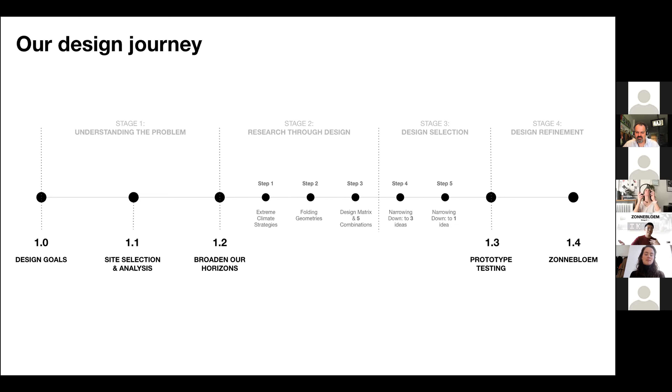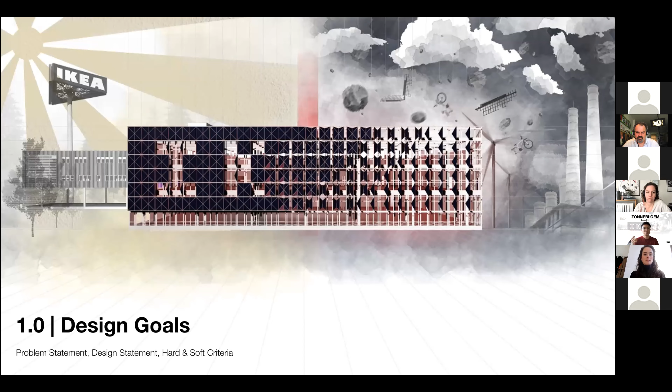So let's begin. It's important for us to understand the main problem we are tackling: extreme climates and self-protecting PV panels. Our group focuses on the real possibility that as climate change progresses, extreme weather conditions will be more common than today. Hence, it is pertinent that Zonnebloem first protects itself, is durable, and be a visual inspiration for the masses towards sustainable design. Therefore, the important hard and soft criteria are as described so we can achieve our design vision.

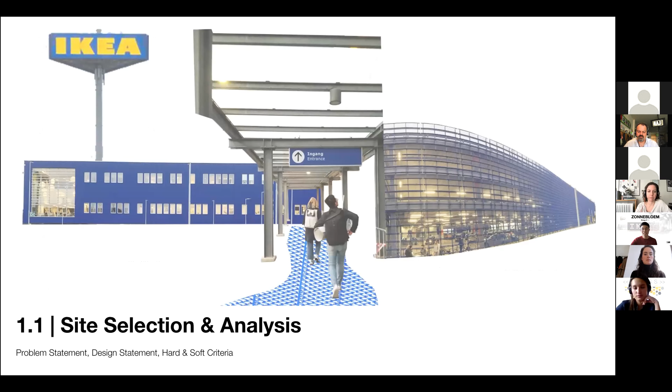Next, we look into a range of existing building typologies and sites based on criteria such as scale of operation, feasibility, and whether it is a standardized typology that can be widely implemented. Eventually, we narrowed our selection to the furniture retail giant IKEA in Delft, largely due to its advantage of being a highly visible building. It has a global scale of operation, maximizing the potential of Zonnebloem in inspiring more people.

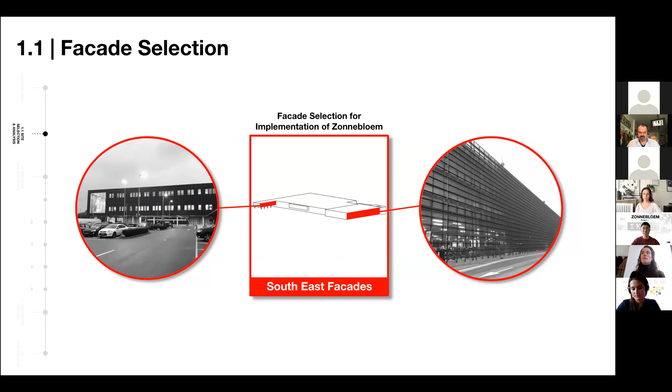With IKEA in mind, based on environmental and visibility studies, we determined the 2 southeast facades as ideal for implementation. Subsequently, we took a deep dive into different solutions to broaden our horizons.

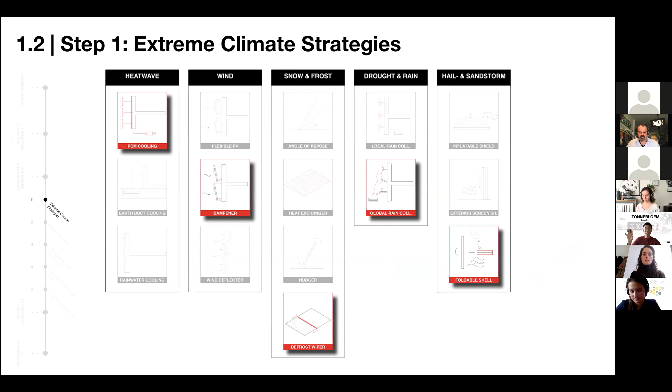First, we took into consideration the different climatic conditions and brainstormed corresponding solutions. From all these, we eventually decided that the foldable shell idea is the one with the most potential in terms of being durable, being appealing, and usable in many different extreme climates.

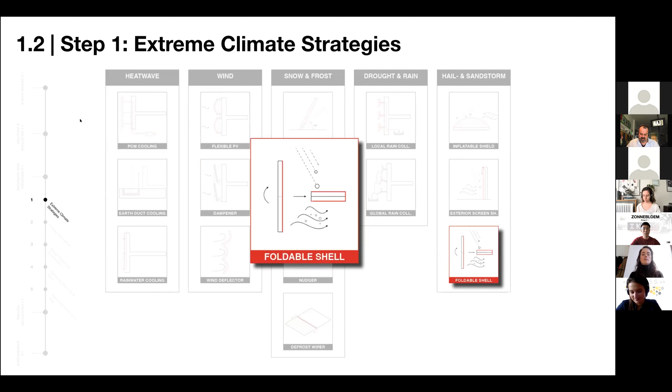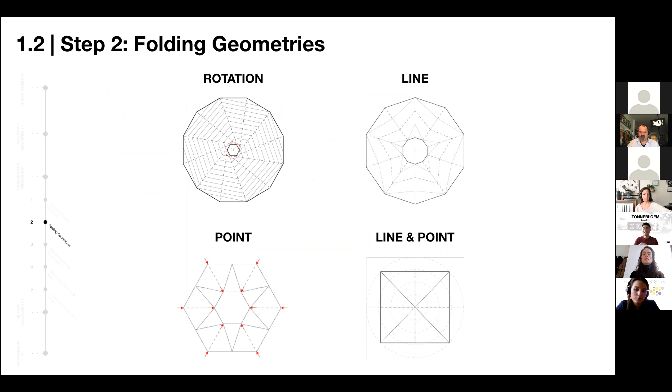This sprouted a whole new branch of exploration as we tried to understand how foldable and deployable structures actually work. They can be categorized into 4 main types.

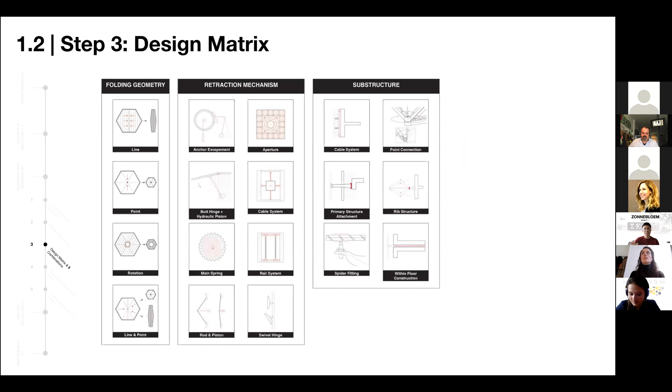Together with understanding how we retract the folds and structurally support them on the facade, we constructed a design matrix whereby individual types of folding can be matched with corresponding retraction mechanism and substructure system, as shown in this diagram. These 5 ideas we brainstormed are the potential candidates for the final design.

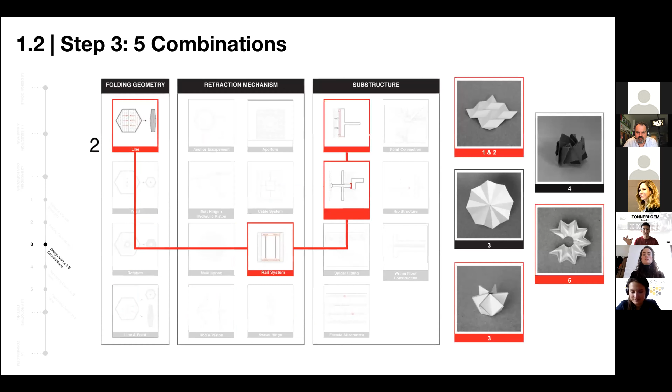With these 5 ideas, we further narrowed them down into 3, which we developed in detail to fully understand how each of them work.

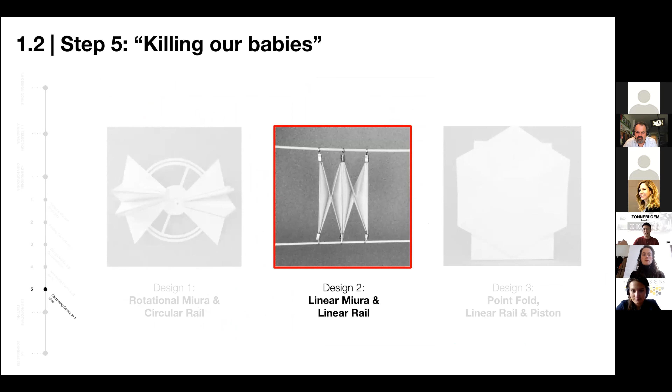In a painful process we call killing our babies, we attempted to select the final idea to move forward with, and the difficult decision brought us to design number 2, a simple Miura fold on a guided linear rail. While we were all quite sad, we had to forge on with the prototype testing phase.

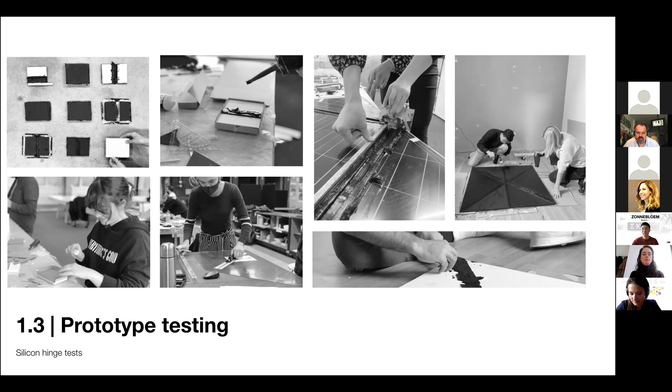We aimed to resolve some of the unknowns within our final design, which most notably lies in the silicon hinges that we chose to make.

As we explored and tested various silicon profiles, we ended up buying all the black silicon tubes from 2 different HEMA stores. Through a mixture of failures and sticky hands, we determined that the double flank open tapered profile best fits our objective of a unidirectional folding.

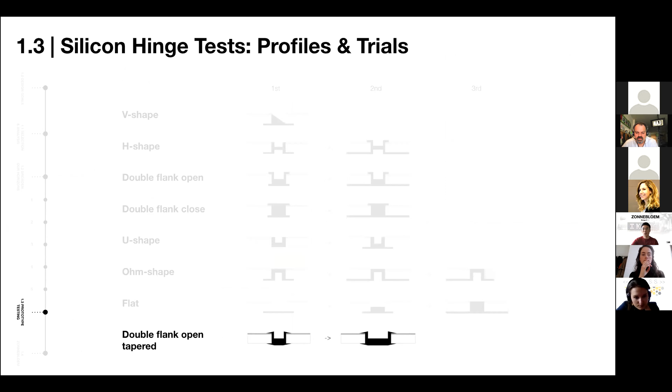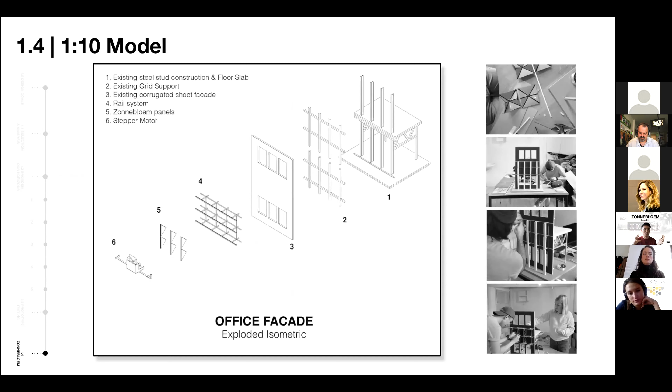With the silicon hinges sort of resolved, we gained more confidence and momentum in building the final prototype for Zonnebloem. We constructed a 1:10 model to review the substructure strategy and visualize the folding of Zonnebloem on IKEA's facade using Arduino, as shown in this diagram.

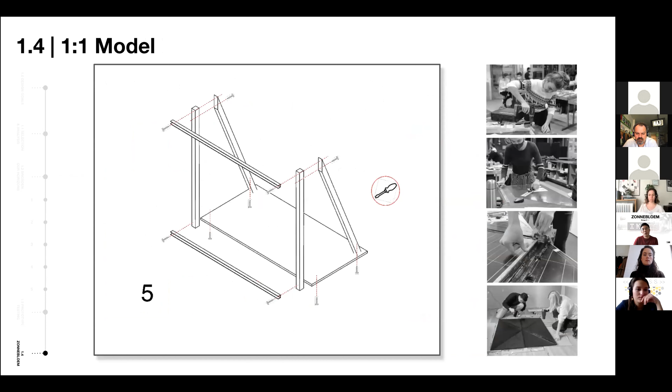Furthermore, this is a 1:1 model, which was constructed to verify our silicon hinge test. Shown here is the assembly process of how the various parts and components come together within this 1:1 model.

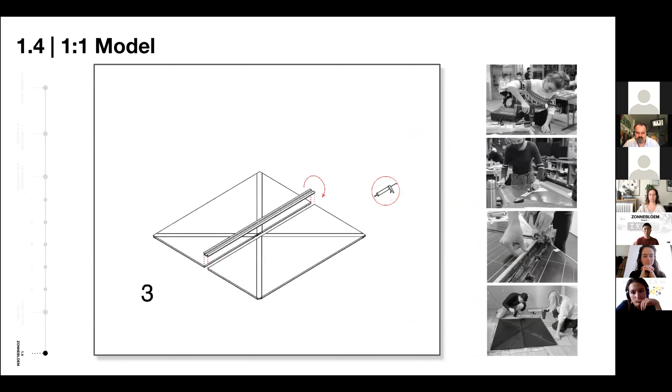Ignoring my awkward moves, we were glad that the silicon hinges worked exactly as they did in the smaller prototypes. It was truly a moment of relief for many of us to see it happen.

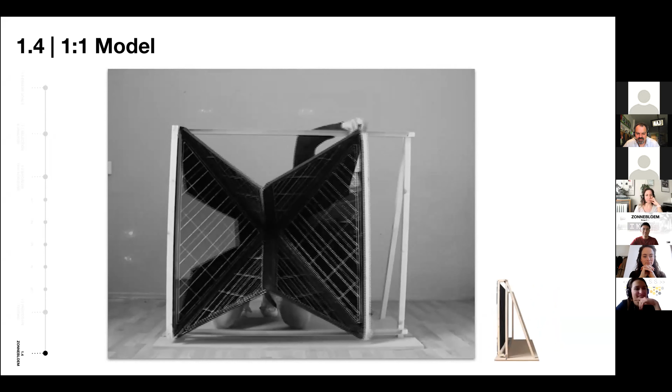At the end of the day, we wanted to evaluate whether this design actually met our original design intention. So we evaluated Zonnebloem against our hard and soft criteria and compared it to a conventional facade PV.

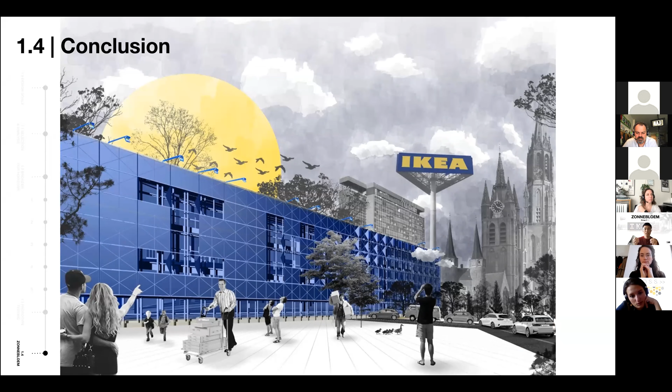We can conclude that Zonnebloem can potentially be more durable and perform better if these production processes were more refined industrially. Over the course of this project, we achieved the following goals and learned many valuable lessons revolving around geometry, the design through research process, as well as ways to enhance the durability of our PV panels.

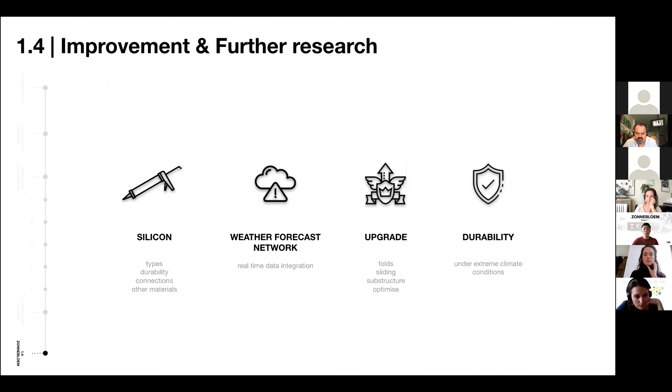Furthermore, we have other areas of research that lie in the domain of refining the silicon hinges, integrating it with weather forecasting networks, and optimizing the components as well as testing its durability.

This brings us to our next part in establishing the widely asked question: how durable is Zonnebloem? Firstly, we define durability within the context of the Netherlands, whereby resistance against hail and wind conditions is crucial. Thus, two separate tests are planned to evaluate its durability: the hail impact test and the wind tunnel test.

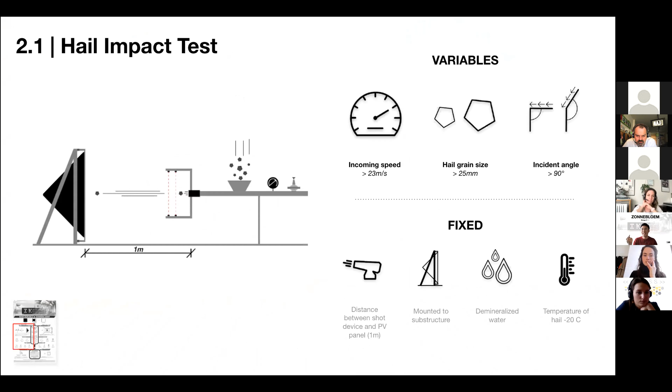A closer look into the experimental setup for the hail impact test: both a commercially available PV and Zonnebloem will undergo impact from hail with varying speed, size, and incident angle. This is how the setup would look like.

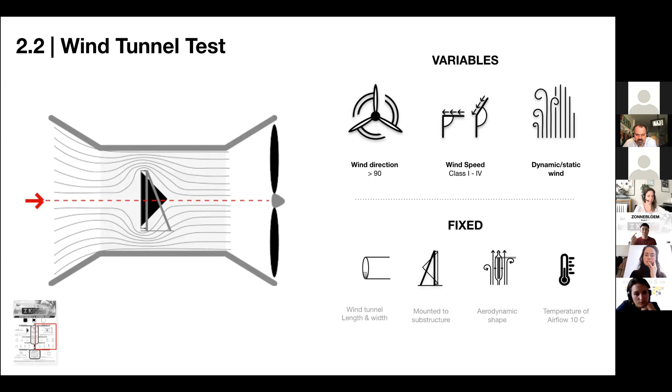Furthermore, a wind tunnel test will subject the PV panels to wind from varying angles, wind speed, as well as different types of wind loads to simulate realistic wind conditions.

Lastly, the durability of the PVs can be evaluated by determining the efficiency loss pre and post experiment. Damage assessment through the use of an electroluminescence camera will also be conducted.

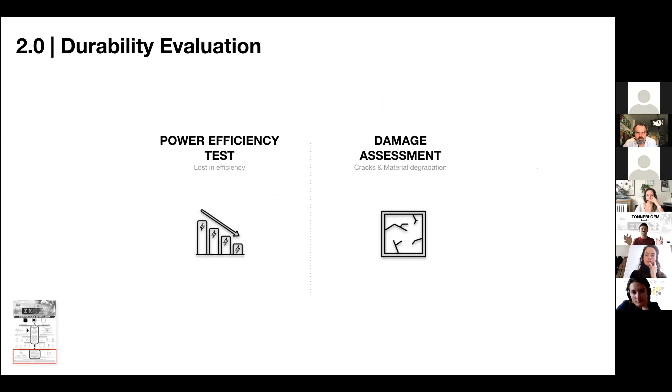Together, they will eventually allow us to establish a scale of damage depicting how different extreme climates can affect the durability of Zonnebloem, and what its upper limits are. At the end of the day, with this knowledge, we could be better prepared for the extreme weather conditions which climate change will bring in the years to come.